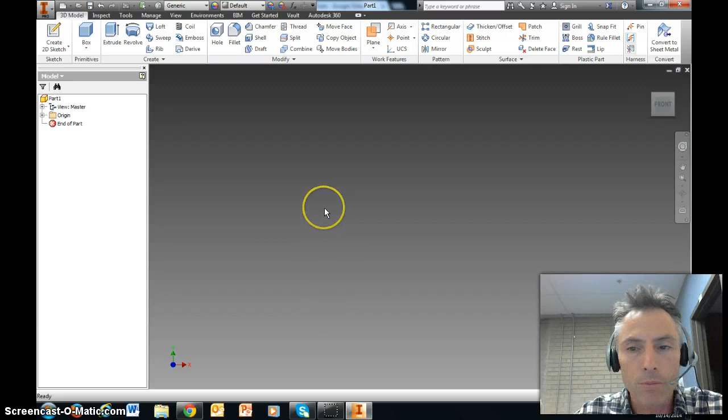Go ahead and open up an Inventor part file, just like you have for the last 2 projects. We're going to create a sketch and put it right onto this front face, which should be the XY plane. Take a circle and attach it right in the middle. We don't have to attach it right to this origin, but just for kicks, we'll go ahead and do that. Now give this circle a diameter of 1/4 inch, so 0.25.

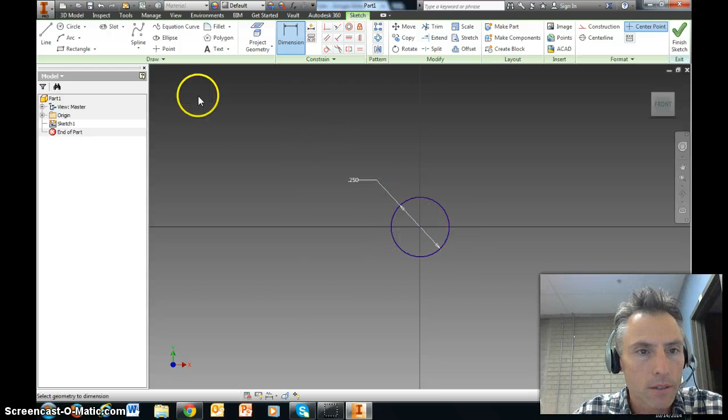Then we're going to extrude it, so we'll go up to 3D model to give it that 3rd dimension. We're going to extrude it 1 inch with a taper angle of -1. So 1 inch is the extrusion distance. We'll go to More, the 2nd tab at the top, and for the taper angle, put in -1. What that's going to do is it slopes down, getting a little bit smaller as it extends out, and that's what we're looking for. So we'll hit OK.

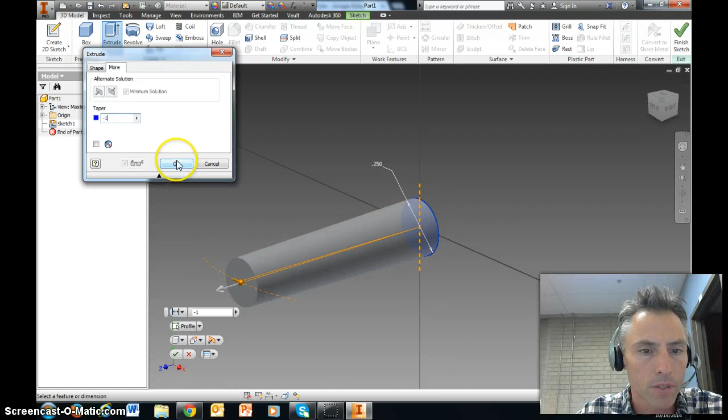Now we want to put a plane that goes right through the middle of this. The first thing I'm going to do is come up to Axis, a work axis, and go to this cylinder, because it's really a cone at this point. I click on it, and that put an axis right through the center of this.

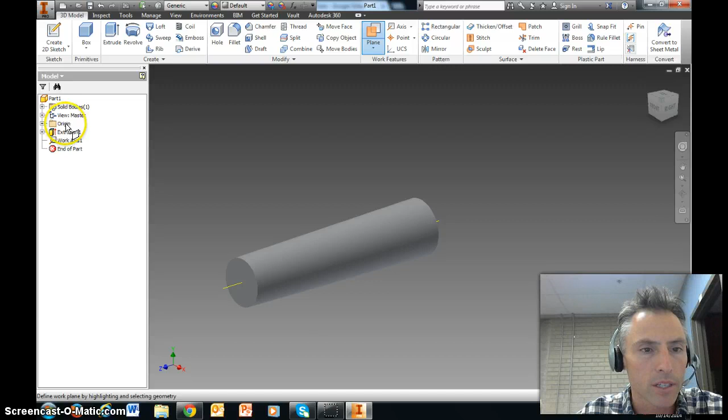Now I can choose plane, and I have to make sure I get the right plane. I'll come over to the left where it says origin. There's a little plus sign, so if I click on that, it opens up all my default planes and axes. If I look at the YZ plane, it goes right through the middle, and if I look at the XZ plane, it goes right through the middle also. If I look at the XY plane, it's flush with the top. I don't want to use that one. Either of the other 2 would work.

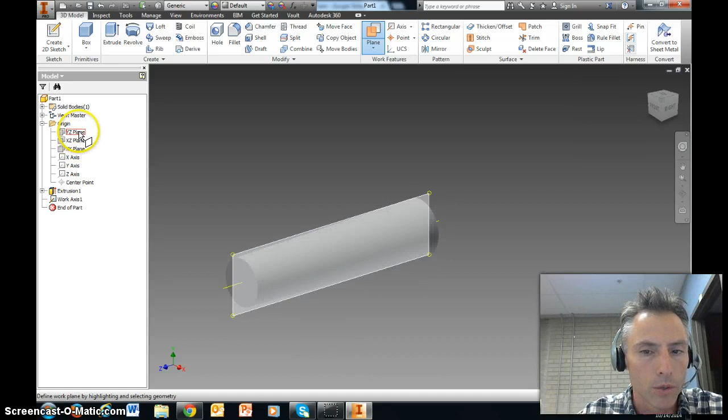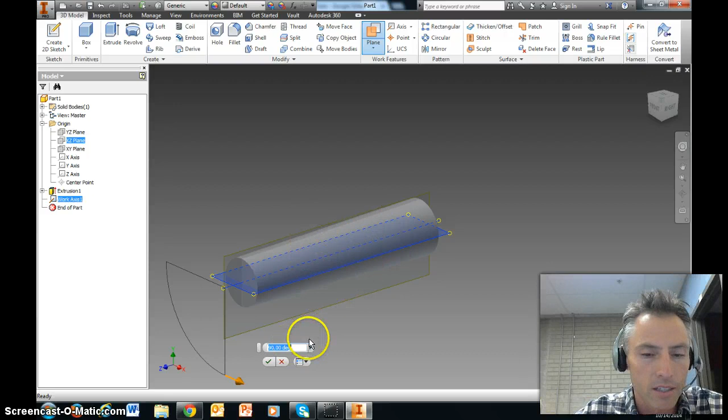So I'll go ahead and choose this one, the XZ. And it automatically, what we want to do is make sure it's going right through this center axis. So after I click XZ, just come over here and click on the center axis. Now it automatically defaults to a 90-degree rotation, which is fine. It doesn't really matter because this is a conical shape and it's symmetrical all the way around. So we'll just say okay, it wants to rotate at 90 degrees, that's fine.

Now we're going to take a sketch and put it on that work plane. So now we're looking right at it. Now we're going to be designing at the bigger end of this. You can see how this tapers down as it comes to the right, so I don't want to design on this side. I want to design on the bigger side over here.

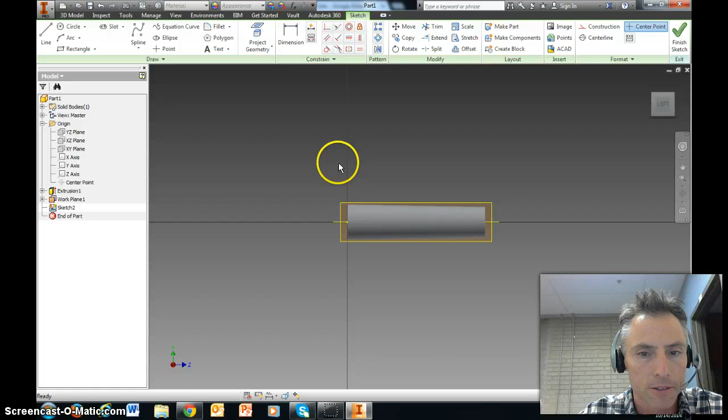And we're going to make the profile for the cap, and then we're going to revolve it. Now I want to be able to see the inside of this, so what we're going to do is right click and choose an option called Slice Graphics. Slice Graphics removes all the material that's in front of the object, so now we're looking at the inside of this object.

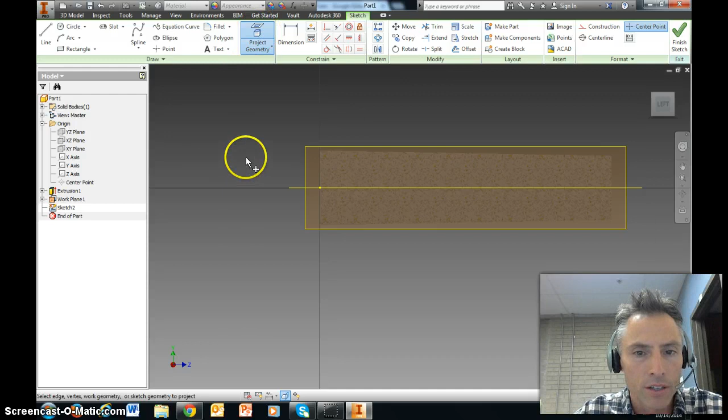Now I want to use another feature called Project Geometry, and what that does is activate some of the edges that we're going to want to use. So I click on Project Geometry. I come select this face, and I select this face, and I select this axis right there. Okay, so now we have some activated lines.

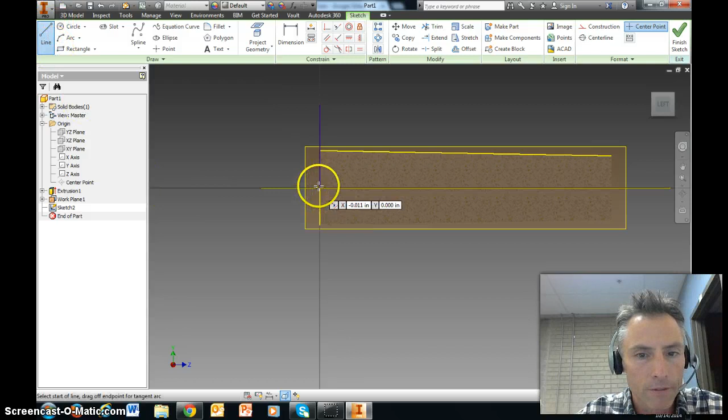Now I'm going to go up to Line, and from this intersection I want a line that comes out this way. I'm not going to give it a dimension yet, just click it right there. Then I'm going to refresh Line so I can start a new line. And from this center axis right here, I also want a line that comes up this way.

And then I'm going to go to arc, and I'm going to make an arc that connects the ends of those 2 lines. I haven't dimensioned anything yet, but it's going to look something like that. There's no dimensions there yet, so now we'll go ahead and put the dimensions on there.

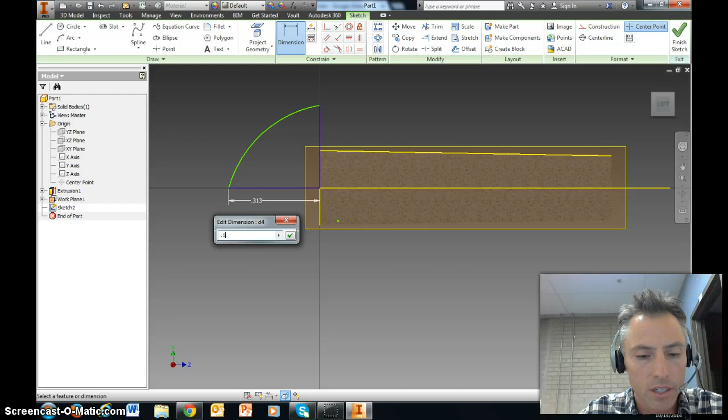I'm going to tell this guy right here to be 0.125, which is 1/8 of an inch. And I'm going to pick this guy right here and tell him to be 0.2. And I'm going to take this arc and tell it to have a radius of 0.2 also. So it looks like that now.

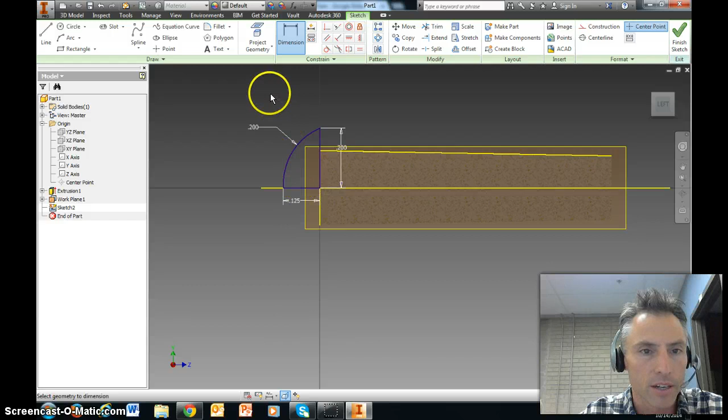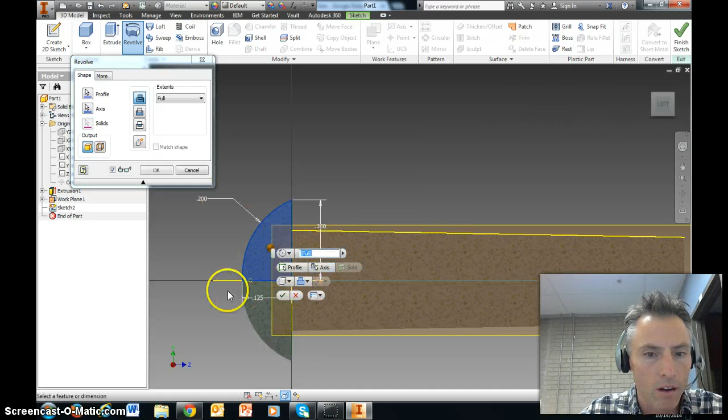Alright, now I only have one more step, and it's going to be revolving this profile around this axis right here. So I'm going to go up to 3D Model, Revolve, and I'm going to go ahead and reorient this so I can see it a little bit better. It already selected the profile, so you see profile right up here, it's highlighted now. So it is now selecting an axis, and I want to select this axis. It's going to revolve that all the way around the axis. We want to make sure it's on full, so it does all 360 degrees. And I'm going to hit OK.

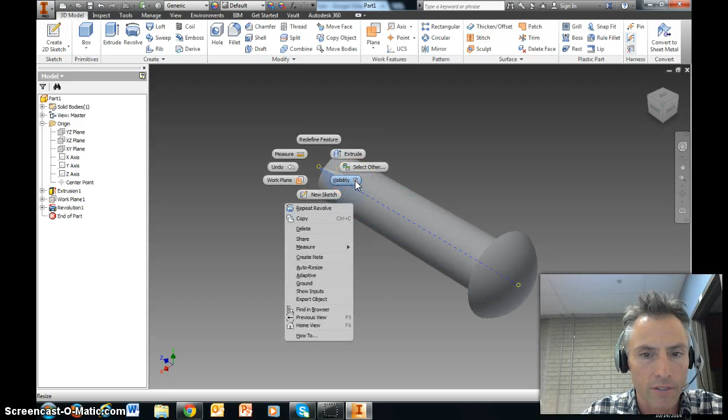And there it is. So now I have my axle peg. Now I don't need to see this plane and this axis anymore, so what I can do is right click on the outside edge of it and uncheck visibility, and right click on the axis and uncheck visibility there too. Alright, and there you have it, the axle peg.